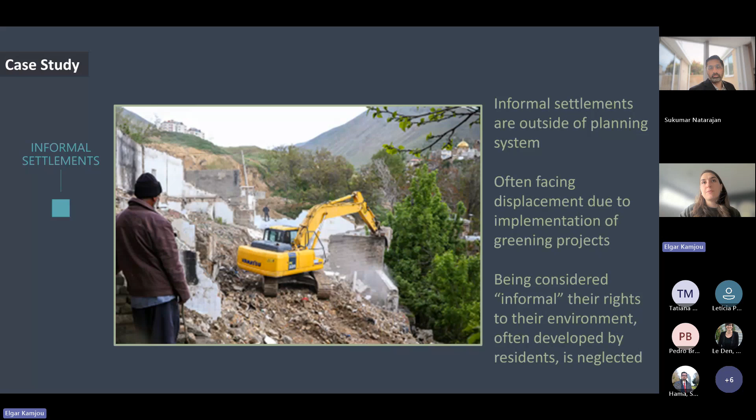What happens as a result of that project is that informal settlements are outside of this planning system because they are not visible in any section of the planning. They often face displacement due to the implementation of greening projects, and being considered informal, their rights to the environment they developed themselves are not recognized. So these green valleys were not originally green—they made it green—and informal residents are pushed away from this green valley for the benefit of the formal residents.

So I focused on two case studies: one called Farahzad, the other Amirieh. One is inside the municipal border of Tehran, the other is outside. Looking into these two informal settlements, at first view when I was visiting, this is my take on how they use green infrastructure.

For example, in the bottom left picture, they have greenways. They use water filtration to filter water for irrigation. They have parks, flood controlling areas, and gardens. I should mention that gardens in informal settlements of Iran are not equal to UK or Ireland gardens—they're not backyards. They are orchards with fruit trees that the gardener actually uses, selling the fruit, and their livelihood depends on this garden. They also have small agricultural land. So this is my take, just from looking at the informal settlements.

But then I talked to people and their perspective is much more diverse. The first theme that came up was that they see social and cultural benefits in green spaces. For example, many residents saw green spaces as part of their identity, memory, and everyday life. Farahzad residents mentioned that the main last name in their neighborhood is Farahzadi, which comes from the link to the gardens in the Farahzad Valley—a really big link to their identity.

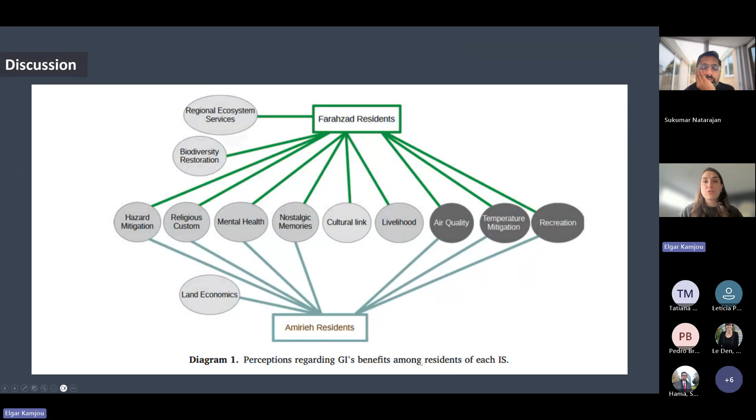Both groups mentioned mental health, nostalgia, memories, religious customs, and hazard mitigation, but land economics was a bit more visible when talking to residents of Amirieh. Air quality, temperature mitigation, and recreation were also mentioned equally and strongly by both groups of residents.

If I categorize them by type of ecosystem services: for regulating services, they mentioned air quality, clean water, cooling effects and temperature mitigation, flood control, sandstorm mitigation, and passive defense against earthquakes. Supporting services included biodiversity conservation, and provisioning services included food production, agricultural lands, foraging, and gardening. Cultural services such as recreation, visual qualities, nostalgia, relaxation, enhanced sense of belonging, religious customs, and well-being and health were mentioned very often.

Farahzad residents also had a different perspective towards these services. For example, their concern about addicts' presence in green spaces was bigger than the residents of Amirieh. In Amirieh, residents were mainly concerned with male dominance in the public green spaces.

I'm very conscious of the time, so I'm going to skip to the final slide to conclude. While green infrastructure is believed to be a non-priority concept in informal settlements, interviews with residents show that not only is green infrastructure necessary, in some cases it is a matter of survival. Being under the title of informal, as defined by the planning system, makes it easier for that same system to neglect the benefit and necessity of green infrastructure for informal settlements, and to attempt to evacuate these areas for the benefit of formal residents. This means informal settlements are purely invisible to the planning system, and therefore to the plans.

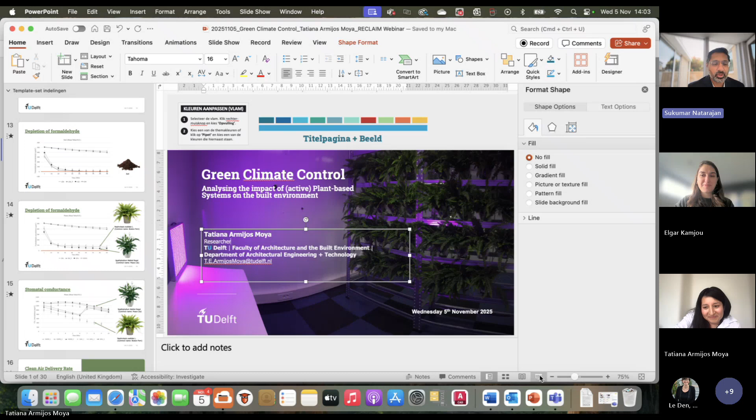I was really looking forward to this day to present a little bit of my research. I'm Tatiana Armijos Moya. Currently I am a researcher at the Faculty of Architecture and the Built Environment at TU Delft, in the Department of Architectural Engineering and Technology, where I developed my PhD. So today I'm going to present the green climate control system that I have developed, which is basically analyzing the impact of what I call active plant-based systems in the built environment. So within this research, what I was aiming to answer was basically: can plant-based systems improve the environmental quality in the built environment, and if so, how?

It's a big question, and I will try to give you some answers during this talk. As Elgar presented before, there are so many benefits about having plants indoor and outdoor. As human beings, we have this instinct to be close to nature, so we are always going to try to go towards nature and be connected to it in any way. This psychological effect of being next to greenery or in contact with greenery is always very important psychologically. There have been several studies that say it helps reduce sick building syndrome, as you might know. It also improves the social and cultural benefits of having plants next to us, which have been well documented. But within this PhD, I wanted to go to the physical side, actually how to measure these benefits. So I will present today how to actually measure some of these benefits and see if plants really improve the indoor built environment, and how.

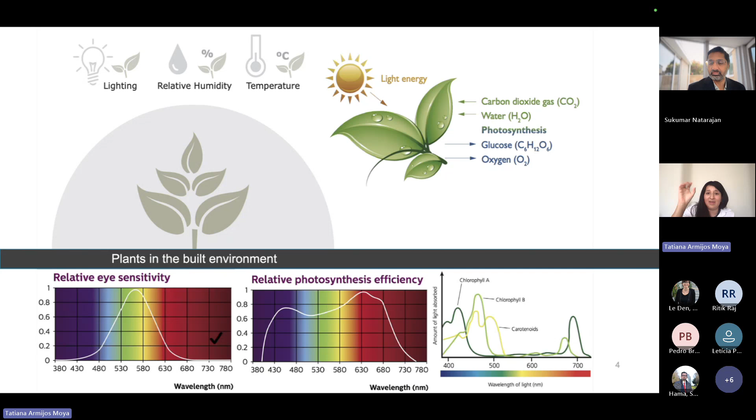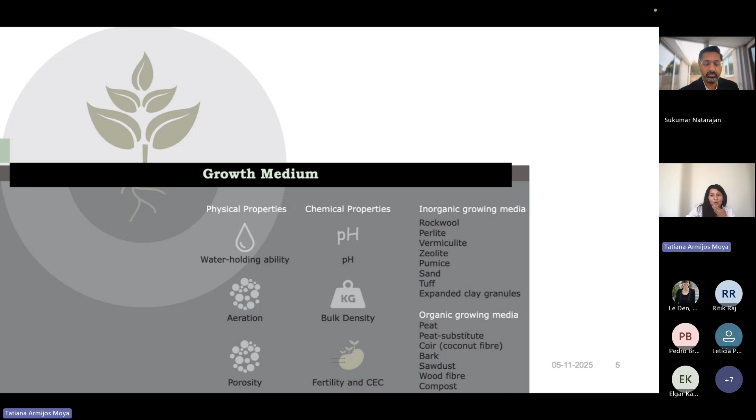Another important thing to take into account for a happy system is to have a proper growth medium. There are certain characteristics of the growth medium. Normally, soil is a good medium, the plant will grow healthier and have all the elements it needs to grow and keep the benefits we want from the green system. I'm not going to go into the details, but it's important to consider this, because growth medium is fundamental in terms of how to improve the air quality and the thermal quality within the environment surrounded by the plants.

One of the things I'm going to take now is about the thermal

The aim of this prototype is to measure what it's like to have a plant-based system in a hot, dry climate. While measuring and developing a mathematical model, we could see that having this kind of system works really well in hot, dry climates, because the green wall will drop the temperature down and increase the humidity. So having this kind of system in a hot and dry environment is going to be very good for the thermal quality.

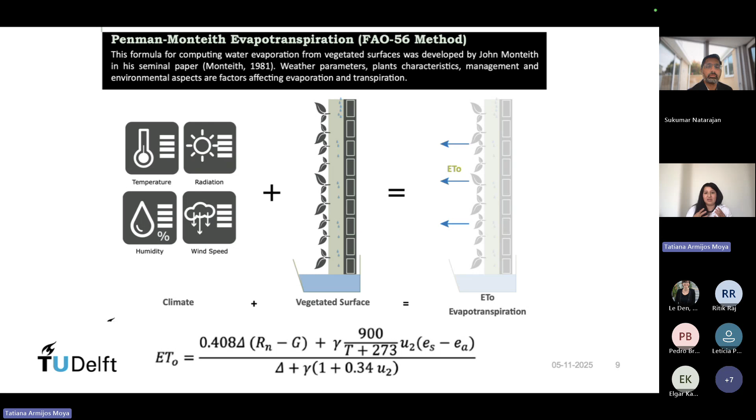I used a mathematical model developed by the Penman-Monteith evapotranspiration method from the FAO 56. This helps account for how this kind of system works in hot, dry climate conditions in terms of environmental quality. As you can see here, with the proper plant-based system, we create a more chill environment with a little bit more humidity. You have to be aware of everything that the system you are introducing is going to produce within the built environment itself.

Talking about indoor air quality, the big question is whether plants can actually improve indoor air quality, and if yes, how? There have been several studies starting from NASA in the 80s that made a big list of how plants improve air quality, listing how different plants behave with different kinds of pollutants. What we have discovered over the years is that plants indeed help to improve indoor air quality in different pathways.

There are different ways that the plant and the root environment can absorb pollutants. It can be that they absorb the pollutant through the stomata, or sometimes through the rhizosphere, where the soil around the root area helps a lot to digest the pollutant in different ways. If we talk about particulate matter pollutants, for example, some pollutants attach to the leaves, and the plant absorbs and digests this pollutant in a different way.

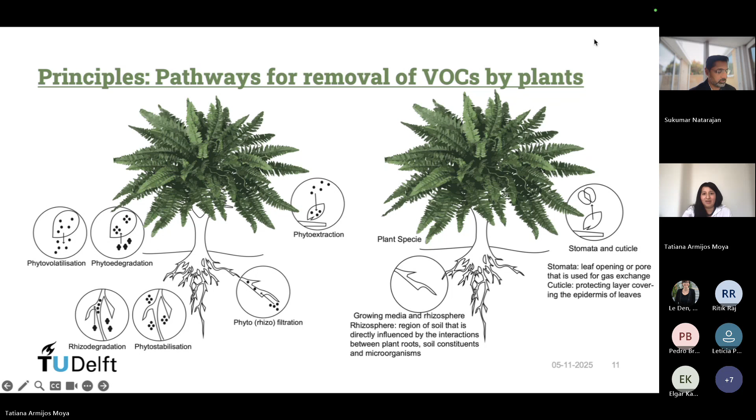So you have to understand very well which plant you choose in order to get which benefit. That's why I mentioned at the beginning that the selection of elements is going to be key. To understand whether the plants selected are the right ones for this prototype and to understand how to improve indoor air quality, I spent 6 months conducting experiments at a university in Wageningen in the plant research group, where I used their setup to measure, using formaldehyde as a gas to understand how plants behave with this pollutant specifically.

Formaldehyde is a pollutant we can find in almost every household - in cleaning products, in glues used in our materials. It's a pollutant we are surrounded by all the time. That's why I chose this specific pollutant to showcase the behavior of plants when surrounded by this pollutant.

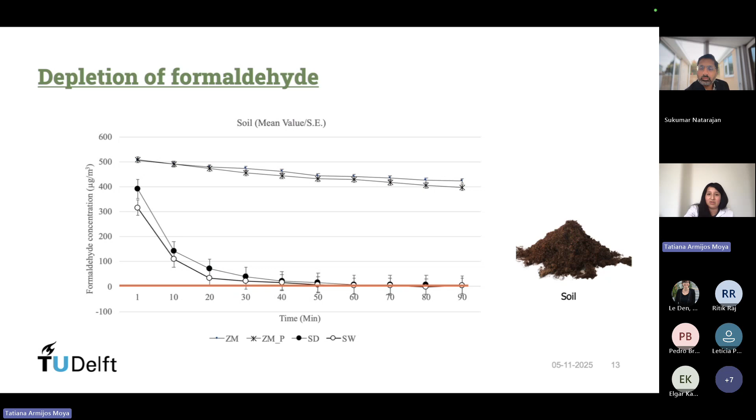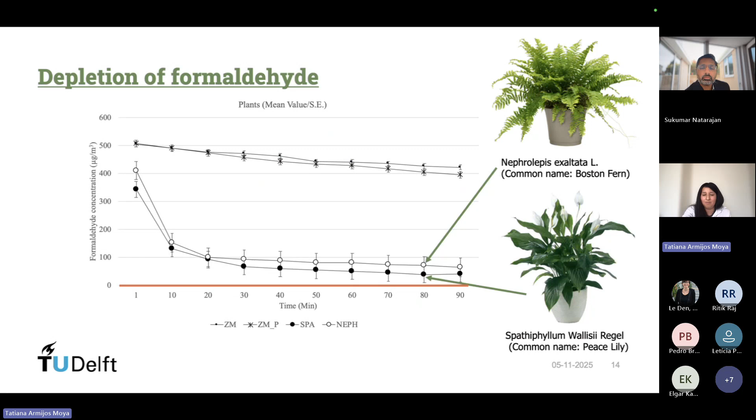In the case of the plants, we can also see the natural decay of the pollutant without any plant inside. But when we introduce the plant, even though it doesn't reach 0%, the plant itself also absorbs a lot of the formaldehyde, helping to absorb most of the pollutant around it. The soil makes a very big impact as well in absorbing the gas pollutant, so together they are the best combination to make an impact on air quality.

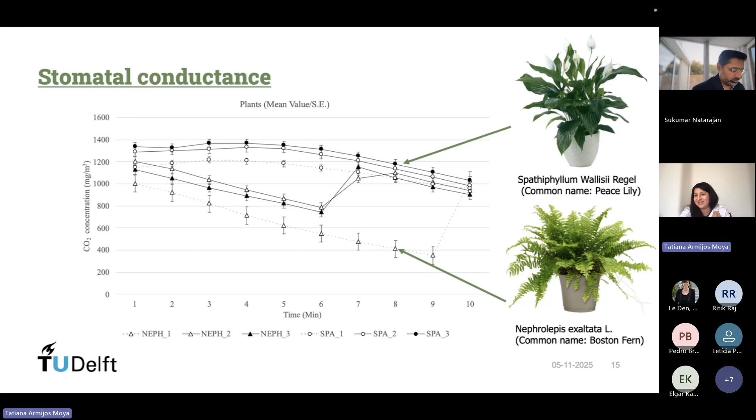Happy and healthy. But at one point, the CO2 level was absorbed super fast by the fern, so it was reaching basically an unhealthy place. So I had to inject more CO2, meaning that the stomatal conductance of the fern is even higher, so this plant exchanges more gases in and out. So we can see that this is more effective in terms of absorbing gaseous pollutants. It's not that the peace lily wasn't, but this was just, let's say, more effective.

Once all the tests were conducted, I did several, testing different kinds of substrates. Within that, it was soil, activated carbon, and expanded clay. And from the plants, I tested the peace lily and the fern, as I mentioned before. It seems more effective that the formaldehyde was absorbed equally by both plants, and it was even better absorbed by the wet soil. So within all the setups I put in this experiment, wet soil was the best.

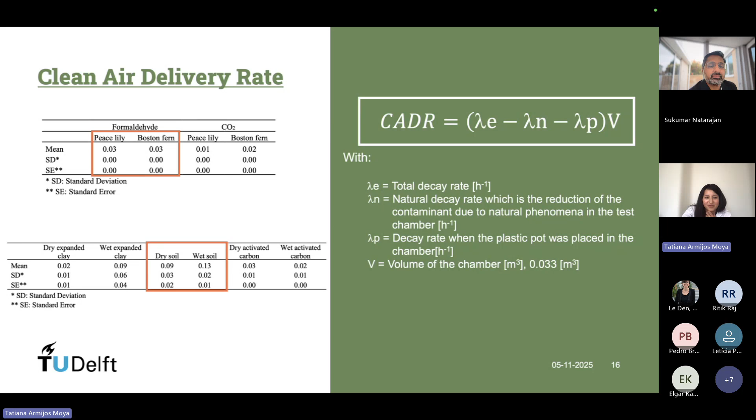But we don't want to remove this effect of the greenery, so we have to make the best combination for your prototype later on. As I mentioned before, the selection of materials is key. So the Boston fern was the plant that was selected, but instead of soil, it was chosen to do expanded clay. I want to explain why.

The idea of this prototype is to create an active plant-based system. As you can see here, a fan was introduced into every pot in order to accelerate this process of absorption of the pollutants from the air, and actually force the air to go through the plant, through the roots, and not let it go by itself. So really force the air to go through the system. If we use soil instead of expanded clay, it means the level of energy you need to push the air through the system is going to be really high.

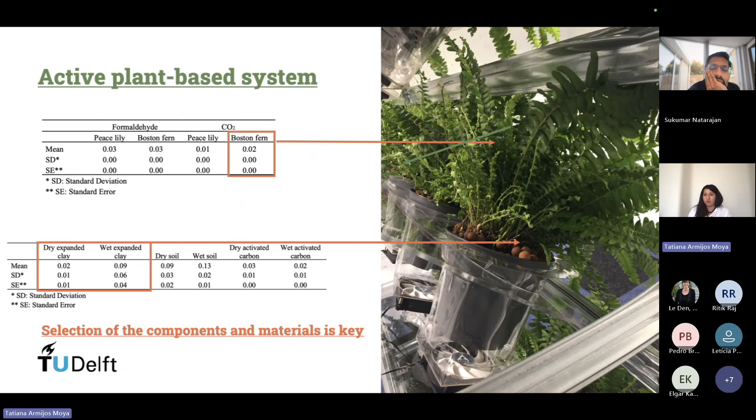So in this case, expanded clay was chosen because it was a really good growth medium, also gives very good benefits in the absorption of the pollutant, and at the same time, gives the space to actually absorb the air and help this active biofiltration system.

So here's how it works: the air is actually being forced to go through the plant, but also through the root medium. As I mentioned before, that is really important in terms of indoor air quality. This was placed in a wall that was later on also tested in a lab.

What I wanted to mention before about this selection of materials is that every material also emits pollutants. So it's very important that within the materials you choose to make your prototype, you also select materials that don't emit a lot of pollutants, because otherwise you don't make any effect in the improvement of indoor air quality. So I built up a wall with these biofiltration systems, and this was placed in our lab.

We have a lab that we call the Sense Lab here at TU Delft. Basically, in this Sense Lab, what we can control is all the setups in terms of ventilation, amount and quality of air quality inside, and the lighting. So we tested different kinds of situations, and I chose two rooms that are exactly the same. They are built with materials that don't emit any kind of pollutant either.

Then I did a blind test where one room was furnished with a new carpet together with the green system, and the other one just with the carpet, to evaluate the acceptability, the intensity, and the preference of all the people that tested this experiment. As you can see here, the level of acceptability is slightly higher in the room without plants. They measured also a less intense smell, and the preference is slightly higher also for the one without plants.

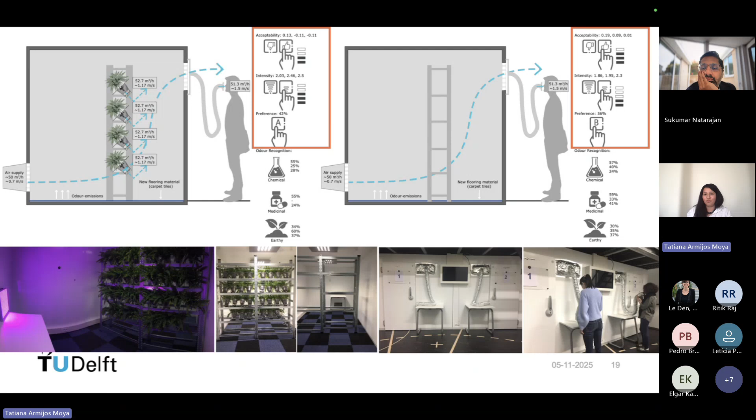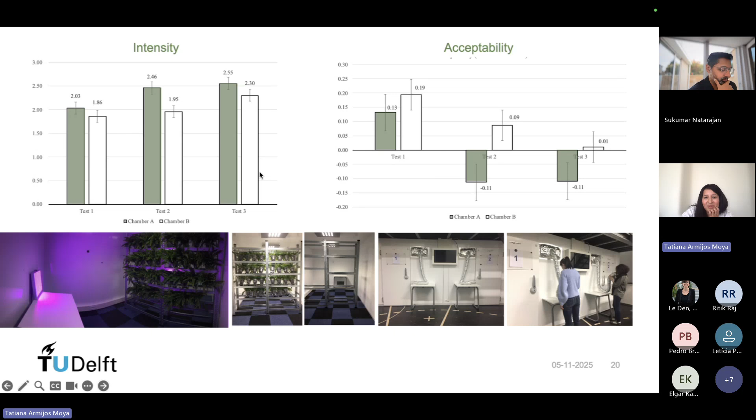So at the end, the conclusion is I have these two assessments - the level of intensity and acceptability in these two rooms, and how they were measured. Slightly higher acceptability in the room without the plants, and slightly less intense in the room without plants. But comparing these different assessments from the physical and chemical effect, we know that plants actually improve the indoor environmental quality and improve the indoor air quality. We also need to design in a way that we don't create more problems within the built environment.

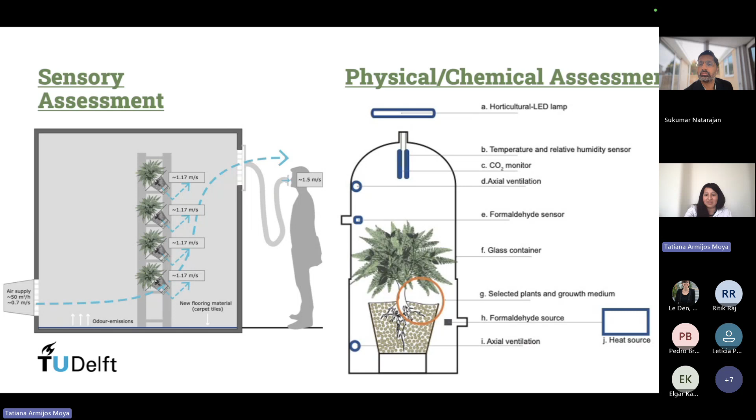So at the end, can a plant-based system improve environmental quality? Yes, it can, but it depends on how we design with the plants. Is it clear that in order to improve indoor air quality, a mechanical system is important to introduce? Otherwise the plant itself will have just a very minimal effect in its immediate surroundings. But we want to make a big effect in a big room, so it's important that we force the air through this system, and also place it in a way that we don't create more problems for the users, the people using the space.

Okay, that's it for me. So thank you very much for the invitation, and if you have any questions, please let me know.

Brilliant, brilliant, brilliant, that was another fantastic talk. So thank you, Tatiana, for keeping up the energy levels for the webinar to such an extent, following up from Elgar. Some questions have come in, although one of them I note is yours, so you've already asked that to Elgar. And then I think Ritik's question was also posted at the time of Elgar's, but it might be more relevant to you - though I think in a way you might have already answered it.

So if you want to just give a brief comment to Ritik's question, which is: plants are used as an intervention to improve indoor air quality - is there any disadvantage of this intervention?